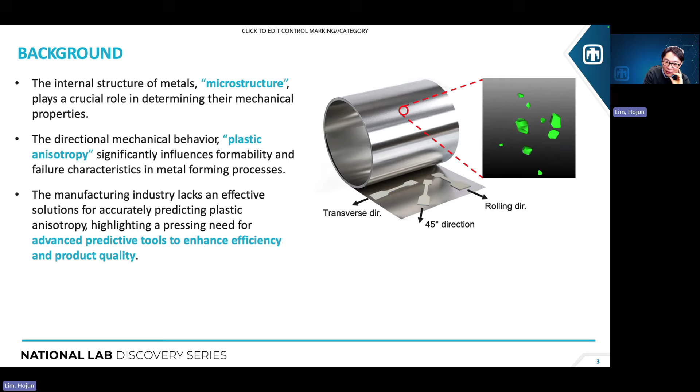So the property of interest in this work is materials' directional mechanical strengths, commonly referred to as plastic anisotropy. For example, if you pull or apply a force to a material in different directions, like transverse, 45, or rolling directions, you would see varying responses. This property is very important in structural applications, as it directly influences strength, failure characteristics and formability in metal applications. In industries such as automotive manufacturing, the ability to form parts from sheet metals heavily relies on understanding these properties. However, accurately achieving this property is not a trivial task.

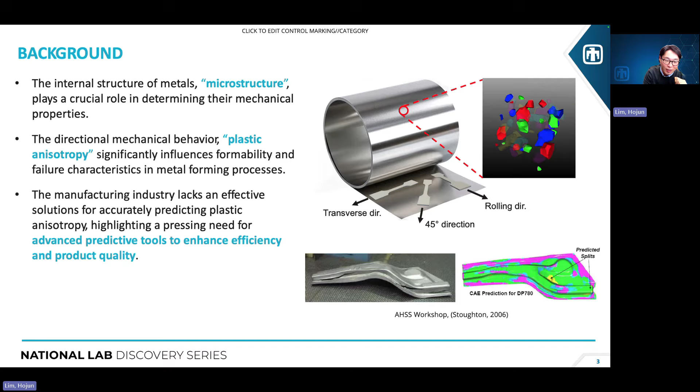The manufacturing industry lacks effective solutions, and there's a strong need to enhance efficiency and accuracy in characterizing plastic anisotropy in different industry sectors as well. So the market has a strong demand for acquiring these material properties, but there are some challenges and problems. Characterizing anisotropy can take from days to weeks, and typically requires specialized equipment and technical expertise. So naturally, this leads to significant resource allocations, making it very costly. Some manufacturers spend millions each year to characterize this behavior.

Also, this leads to some operational shortcomings as industries react to issues rather than proactively forecasting them. There is also the valley of death in R&D data, where R&D data is difficult to understand and it's difficult to implement findings into the manufacturing side. And lastly, there are growing concerns about the carbon footprint associated with many different physical experiments. So our solution to this problem is to develop a tool that leverages the power of machine learning trained from huge high-fidelity computational data. In the next couple of slides, I'll discuss more details about the software that is based on fundamental science, but aimed at solving this engineering challenge.

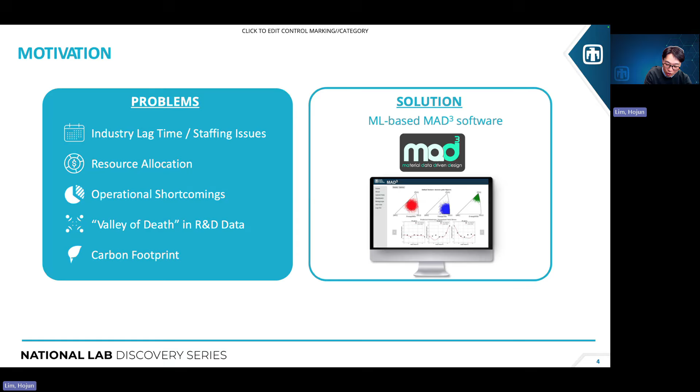All right, so what is MAD³? It is a machine learning-based solution, a software application that uses microstructural data to predict directional strengths in metals. We trained this model from a huge data set, more than 70,000 high-fidelity, expensive simulations. And we used a deep learning algorithm, more specifically a variational Bayesian inference neural network model. This algorithm was packaged into an easy to use graphical user interface, or GUI.

So one of our top priorities was to make it accessible to anyone, regardless of their expertise in computer science, material science or machine learning. So now it is web-based software, so users don't have to worry about installation or compatibility issues with different operating systems.

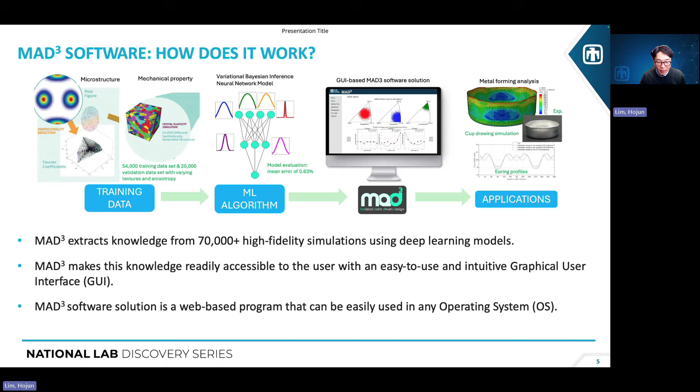Here's a little bit more detail about the software. The input for the software is the material's microstructure data, which you can typically obtain from X-rays or electron backscatter data from electron microscopes. And that has information about the crystallographic texture data of the material.

So once the input data is added to MAD³, the software processes the data, and in a few seconds it provides these directional strengths or the anisotropy or these thinning ratios, what we usually call R values, as well as material data or parameters for different yield models, which you can directly incorporate in any continuum scale simulation software. So again, MAD³ has a big advantage in speed versus accuracy, if you see in that top right corner.

It uses a pre-trained machine learning tool, so that eliminates the need for expensive experiments or simulations. So it is easy to operate, it is fast and cost effective. So now I will pass my mic to David, and he will demonstrate the MAD³ software and share our success stories and some market opportunities and how it can help different customer segments.

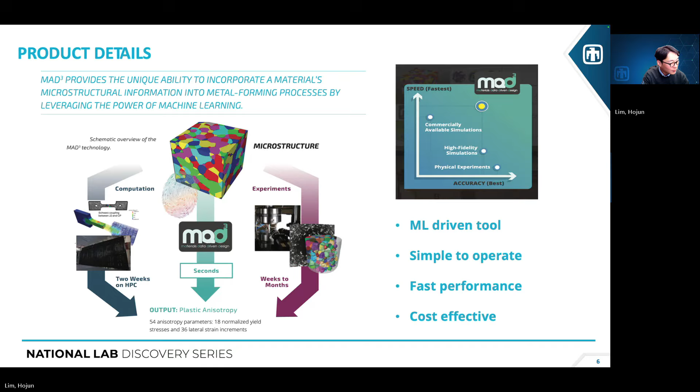So David? Absolutely. Thank you, Hojun, for walking us through how this technology was developed and its potential implementations. As Hojun was mentioning, we packaged this software solution into an easy-to-use GUI that is deployed via the web. So you just need to go to this website, and you can obtain a username and a password. And once you get that password, you can log in.

At this point, I want to mention that without MAD³, if you want to calibrate any of those models, you would either need to run expensive high fidelity simulations, which requires you to have high performance computing, or perform experiments, which means that you will need to have a lab and specialized subject matter experts to run this. With MAD³ you just simply click run MAD³.

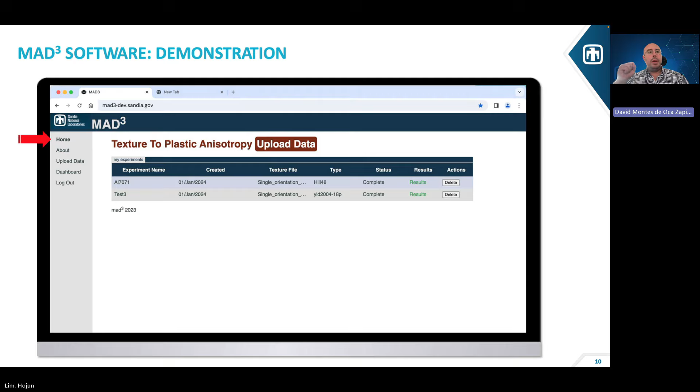And in a couple of seconds, you get taken back to the homepage and the results now change color to green. When you click on the results, that means that they become available. You are greeted with this page right here that shows you how ordered or disordered your underlying structure is from the data that you got. It also provides you with your normalized yield stresses.

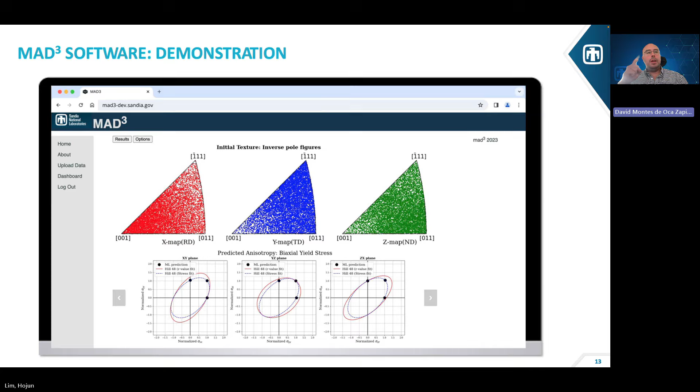These are the directional strengths that Hojun mentioned, and essentially you see that as the angle changes, those will change depending on the texture of your material. You also get information about the thinning ratios or R values. And you also get information about the yield surface. Most importantly, after all this, you also get information about the calibrated parameters.

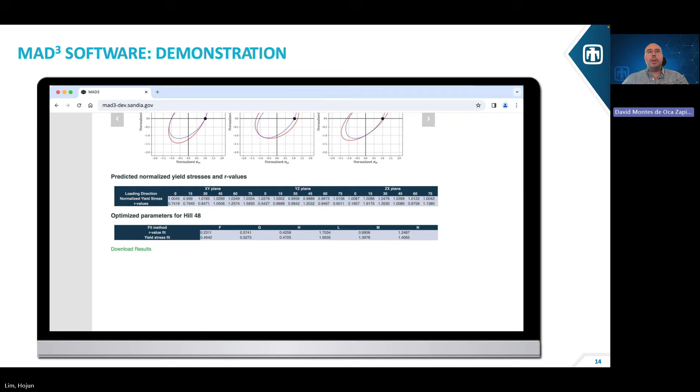You see, in this case, we selected Hill's 48, which is one of the most commonly used. And we obtained those 6 values essentially with the click of a button, using a standard laptop on an easy to use GUI that is deployed via the web, so you don't need to worry about installation. So naturally, as you can see, MAD³ provides the capability to calibrate complex deformation models.

This capability was only previously available to a handful of companies and research labs. However, with this capability, we now are able to do it. And this naturally presents a significant opportunity and opens new implementations and applications for this. We're highlighting at this point a couple of the successes that we've had.

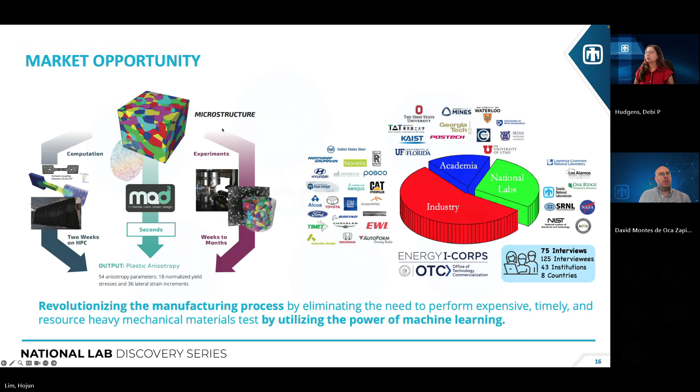slide? Yes, perfect. So what MAD³ would enable, and to echo what Hojun said, if you have a material that is FCC, face-centered cubic, or BCC, body-centered cubic, you will be able to run MAD³ and calibrate the yield models. Currently, we have 3 or 4. I do not remember off the top of my head. And after that, you can run a finite element simulation.

So, for example, in this case of the really specific porous one, if the material is FCC or BCC and you have a yield model that is within MAD³, then you would be able to run a simulation of that porous material, of how it behaves, because MAD³ will enable you to calibrate the parameters for the yield model for that material. Anything that you might want to add on that, Hojun?

No, other than that, we haven't trained our model with porosity or varying defect densities. So it probably won't. But if that's something of interest, we could create a data set and retrain the model to incorporate porosity or any other defects in material. That might be a possibility, yeah.

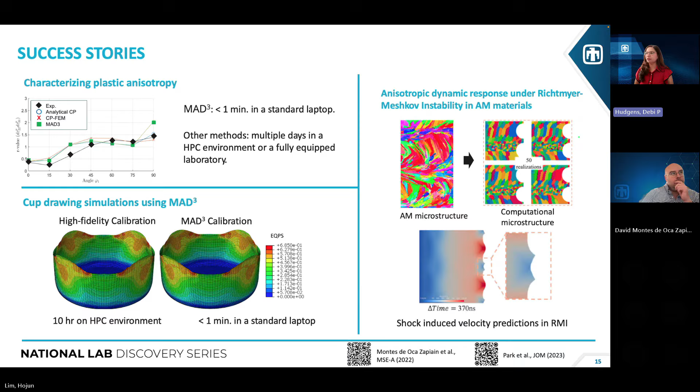There was a question about partnerships and having a green card status. Having a green card status or U.S. citizenship, you can get access to the different licenses that I mentioned, even the research license. I think that's what the question was directed to, but any of them, you would be able to negotiate a license. We do have some sensitivities for foreign nationals of specific countries. And sometimes, depending on the technology, we're able to get special approvals. But by and large, if you are a green card holder or a U.S. citizen, we are more than happy to work with you and your organization.

Okay, well, I think that we are coming to a close. I will maybe just take one or two more technical questions. There is a question if the training set used 2D models or fully 3D crystal plasticity. Hojun, do you want to tackle that? Yes, it was full 3D crystal plasticity models for our training data.

Okay. And I think we'll just take one more here. Are you able to simulate corrosion of the materials in different environments? No, in the current model, we don't have any information about corrosion or the prediction of those properties. We just provide anisotropic strength predictions from this version.